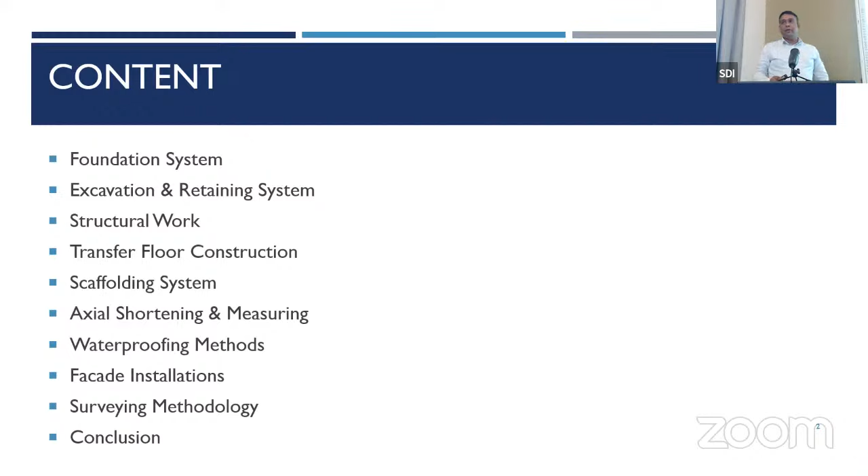This presentation is based on a case study - the Astoria residential project that I was involved in. This is a multi-development project including commercial, residential, and office components.

The project is located at DR Vijayawardhana, R.A. De Mel Mawatha, Colombo 3 in Sri Lanka. That area is normally known as Kollupitiya.

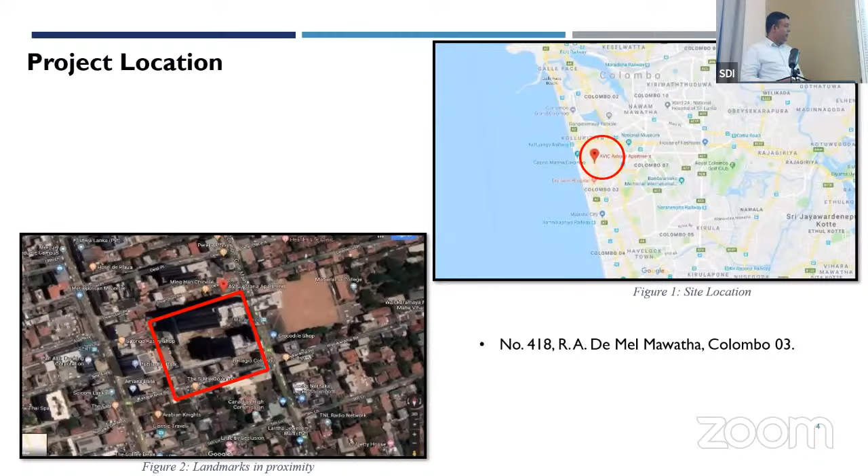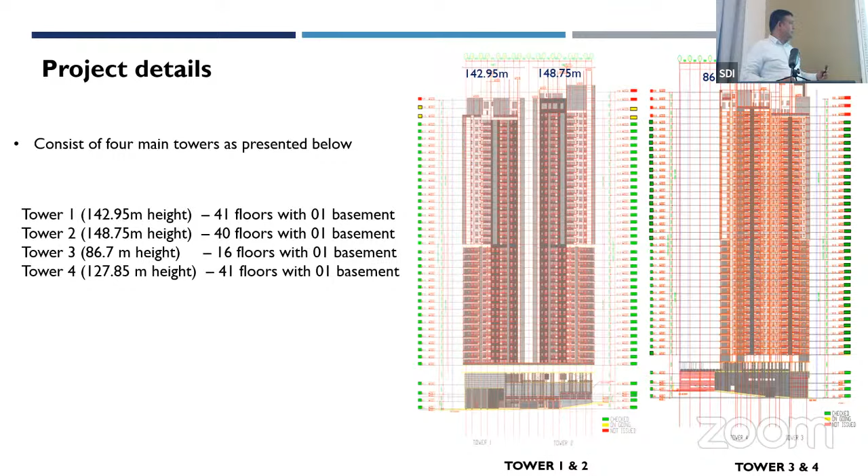The project description: there are 4 towers initially planned, all around 40 stories, but finally there was a slight change in one tower, and the scope also changed. Tower 1 and Tower 2 are residential buildings. Tower 3 is an office building, and Tower 4 is again a residential building. Tower 1 and 2 are almost 150 meters - the highest is 148, and Tower 1 is 142 meters. Tower 4 was earlier designed at 127 meters and that didn't change, but Tower 3 was designed at 127 meters and due to the scope change, it changed to around 87 meters. This is the project layout.

For Tower 1 and Tower 2, the client had already acquired land where the foundation was already done - there was an earlier design for another high-rise building, so all the pile foundation and basement construction were already constructed. Therefore, the challenge was to design the new two towers, converting the existing foundation for the new design, and enhancement and strengthening work was done for the existing foundation and vertical elements. Tower 3 and 4 design was done as a new design, but all 4 towers were amalgamated into one design in the later stage.

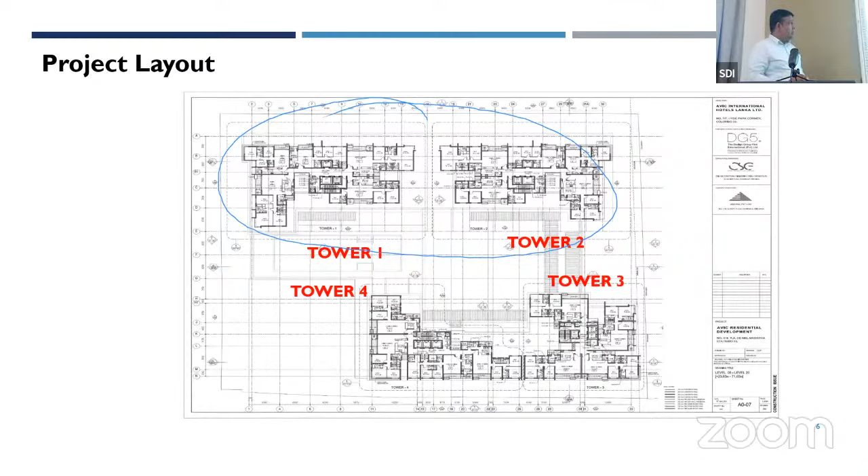So basically for the foundation system, when we consider pile foundation, normally in Sri Lanka most high-rise buildings use pile foundation. So I'm going to talk about piling, but some projects like Cinnamon Life and Colombo Lotus Tower, I've been involved with those projects where we excavated up to the bedrock.

Then we did some raft foundation on top of the bedrock. But here we have constructed pile foundation for tower 3 and 4, and for tower 1 and 2, the piling was done for the previous design, so we used the same pile layout for the foundation for towers 1 and 2. In this project...

we have 4 types of piles by diameter: 800, 900, 1200, and 1800. So total piles are 163. Also for detailing, on the left hand side you can see all the reinforcement detailing done according to the earthquake detailing code established in Sri Lanka. And also for piling rock socketing, we normally use 3 diameters of the pile.

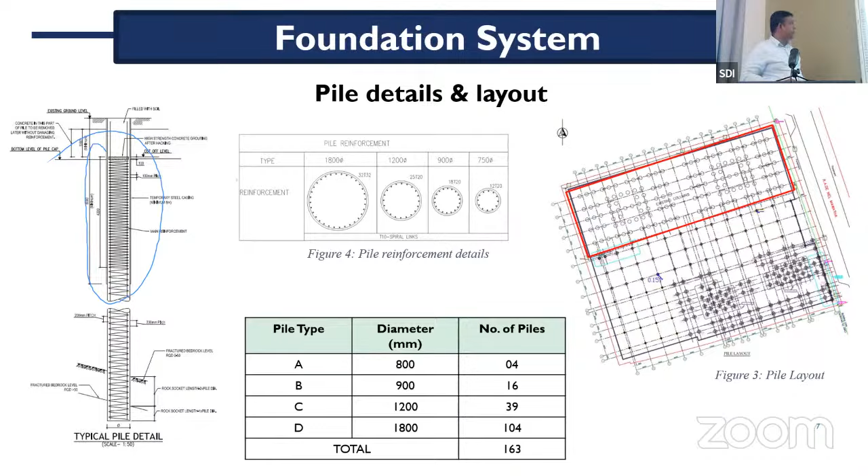So these are the basic construction methodology for pile construction. First you have to do the setting out for the required location. Then we use cast-in-situ piles, and we use very good machines like BG machines to do the setting out.

Then you have to do the casing installation. After that, you have to do the soil boring and rock boring. Once the pile reaches the required level, you have to clean the pile. Before cleaning, you have to insert the reinforcement cage, and then using tremie pipes and bentonite, you have to clean the piles. Once the pile is properly cleaned, you can start the concreting.

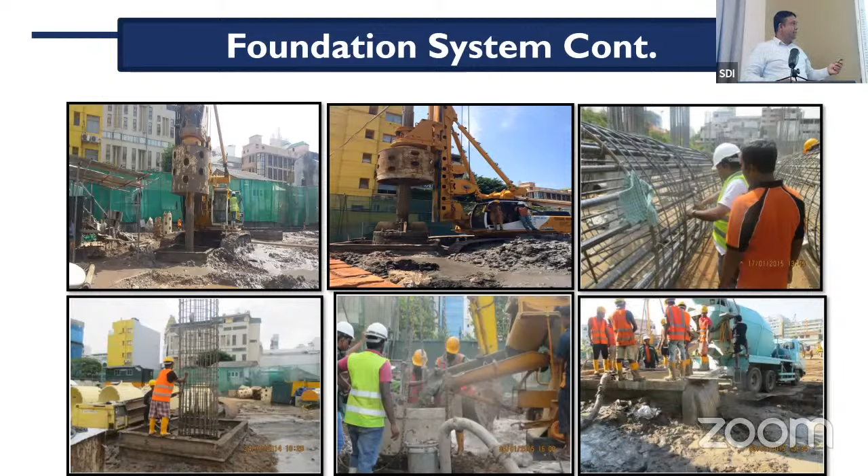Concreting is also done using tremie pipes and funnels. So these are the basic pictures for the piling construction. It's a detailed area, but I'm basically touching on what we have done in the Avic Astoria project.

It's very important when doing pile foundation to determine the rock level. This is basically done with borehole investigation. So normally we do the borehole investigation and identify where the rock level is, and in the normal rock profile you will first find the weathered rock, then the hard rock. So normally the pile socketing will start from the hard rock.

This is important because you can see here there are some formations in the rock, some lower points and higher points. So you can't stop the piling at different levels, because one pile cap having, say, 6 piles for the pile cap, all the piles have to be terminated at one level. Otherwise there will be a different depth depending on the dip angle, so the rock will not be stable.

Therefore you have to go for proper socketing by understanding the rock profile of the piling. This is a mandatory requirement when doing especially high-rise buildings.

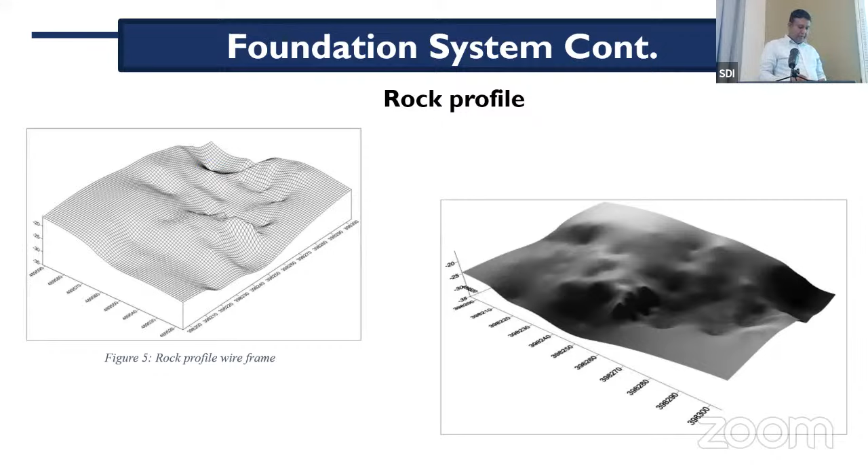Then the other important thing is how you select the piles for testing. This is one of the systems we developed to identify the piling test piles - we call it the fuzzy logic system. Normally if you have 160 piles, the standard requirement is 4% testing for pile dynamic analysis or load testing. Normally we do the integrity test for all the piles, but for load testing we do it for a limited number because of cost factor. Therefore you should have a proper method to identify the most doubtful piles.

So this is the method we use especially for building piling projects, we call it fuzzy logic - we have a scoring system during the construction stage. First of all, we give scores depending on the machine. The first column is the machine: if the contractor uses a good machine, we give a low score. If they use some old machine that takes a long time to do the boring, we give a higher mark.

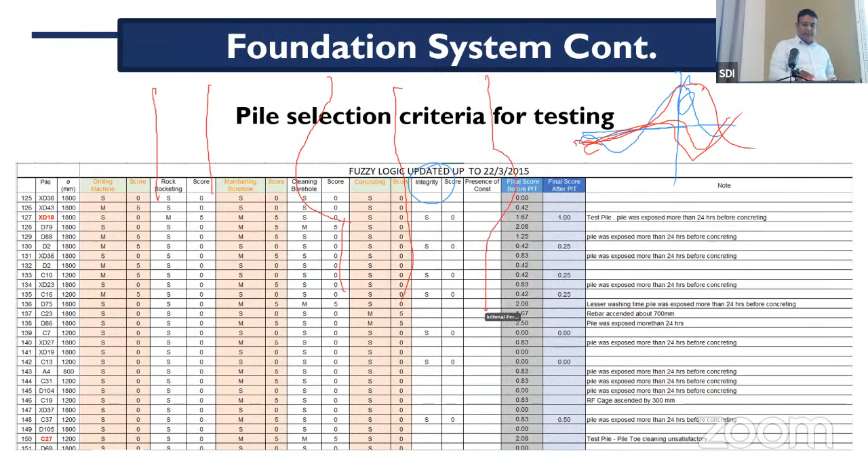Depending on the pile, there can also be bulging on one side, which we call pile necking when concreting affects the neck. That is another defect we can identify in the PIT test. If it's bulging, it's not a major issue, but if it's necking, we increase the marks. Based on that, we identify the total marks and give final scores.

Final scores are given, and for the highest marks, we select that pile as the test pile. This is the method we normally use when we have a huge number of piles.

So these are the pile tests. We have to do the PIT, and normally we do the maintained load test for the test pile. Here in Victoria, we haven't done the MLT before designing the pile, but normally it's recommended to do the maintained load test, which gives a good understanding of the pile's capacity. We also normally do PDA, pile dynamic analysis, on about 4% of the piles, dropping the load and analyzing it with the pile analyzer.

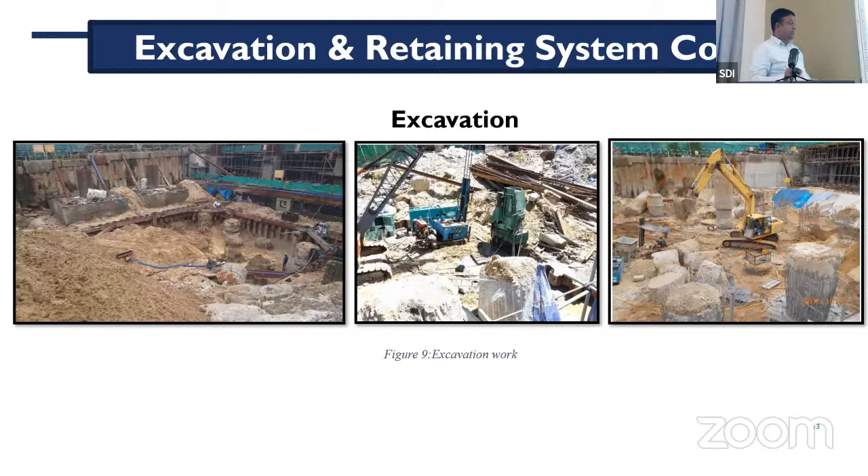During excavation, it's very important to maintain all the parameters, such as the deflection of the retaining wall. You have to monitor the deflection of the retaining system, as you can see here with the pile hacking.

Sometimes for the test pile, before excavation you have to cast it up to the ground level, then you have to hack the pile down to the required level. These are some of the normal practical problems we face with the hacking.

Another important aspect in deep excavation is grouting. Why do we need grouting? That's the most important problem, because most clients are reluctant to do it. They say if you're doing a solid retaining wall, why do you need it?

But when you're doing secant pile or sheet pile, you can't see what's happening underground, so there can be construction defects. To avoid that and get a remedial action, we do grouting along the excavation perimeter. That's why we recommend and use pressure grouting along the excavation perimeter - it fills the voids, enhances impermeability so water won't come into the excavation pit, and strengthens the structural retaining wall.

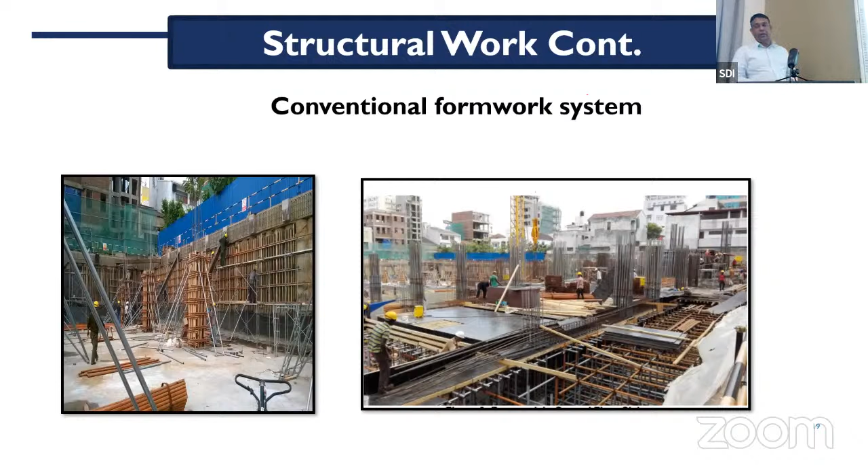There are two formwork methods: conventional formwork or aluminium/system formwork. Here we use conventional formwork because in the basement, the column layout and beam layout change floor to floor. Normally at typical floor level the layout doesn't change, but other areas always change, so it's recommended to use conventional formwork since it's more economical. That's the normal method we use for formwork in the basement.

For the typical floors, normally in high-rise buildings we use aluminium or system formwork. In the Avic Astoria, which has typical apartments, we use aluminium formwork. For the Colombo Lotus Tower stem, it's the same shape and formwork, but the radius and shape change every 5 meters.

For that we use system formwork with a hydraulic system - the shape is changed using the hydraulic system. Here it's a normal straightforward aluminium formwork. These are the advantages: normally we can maintain a 4 to 5 day cycle with this aluminium system, and you can use the same formwork 250 times.

So it's a very low wastage and environment-friendly system. Currently most contractors modify the aluminium formwork depending on small changes like that. It can also bear high loads, such as 60 kilonewtons per square meter. When designing the formwork, it's better to get a higher load capacity for this one.

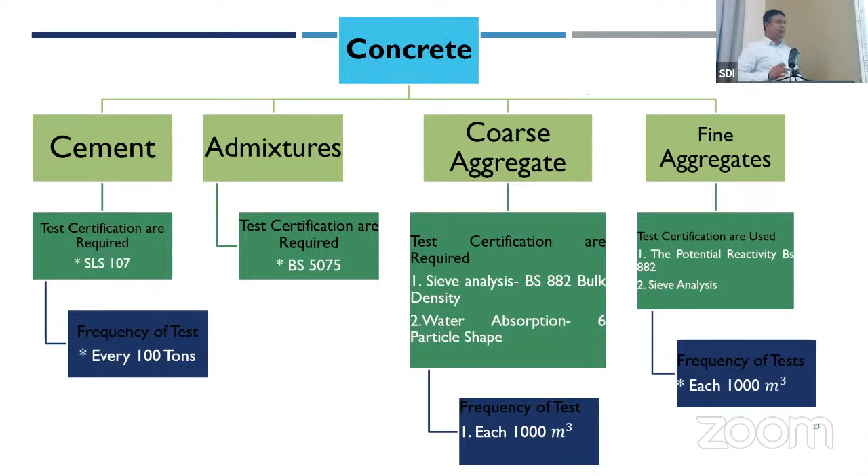Also fine aggregates - nowadays we have a scarcity of river sand, so we use alternatives such as manufactured sands and sea sand, washed sea sand. Normally we recommend using washed sea sand.

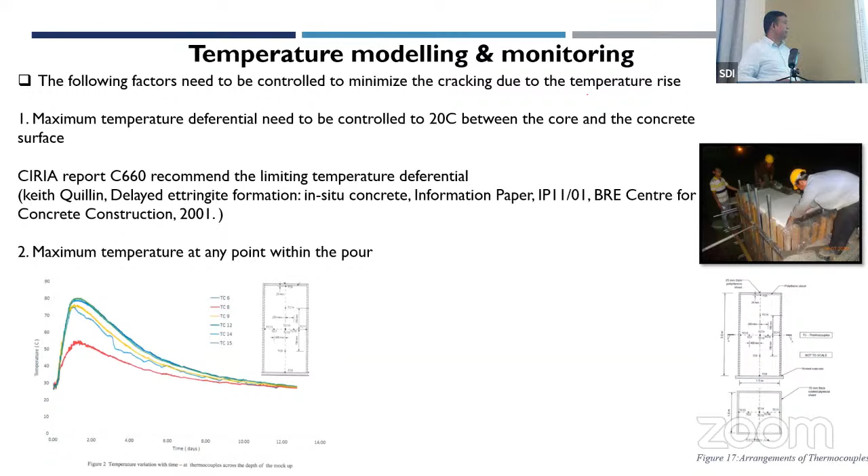These are the guidelines given in the specification, but we also use the same guidelines with modifications. Normally in our country, we have a very high temperature, so our concrete core temperature can go up to 75 to 80. But the temperature difference is limited within 20.

So normally you have to do a concrete mock-up. Here you can see the picture - we have done the mock-up, 3 sides insulated and one side with normal formwork, and we inserted thermocouples to measure the temperature. You can see when hydration starts, the temperature increases with time.

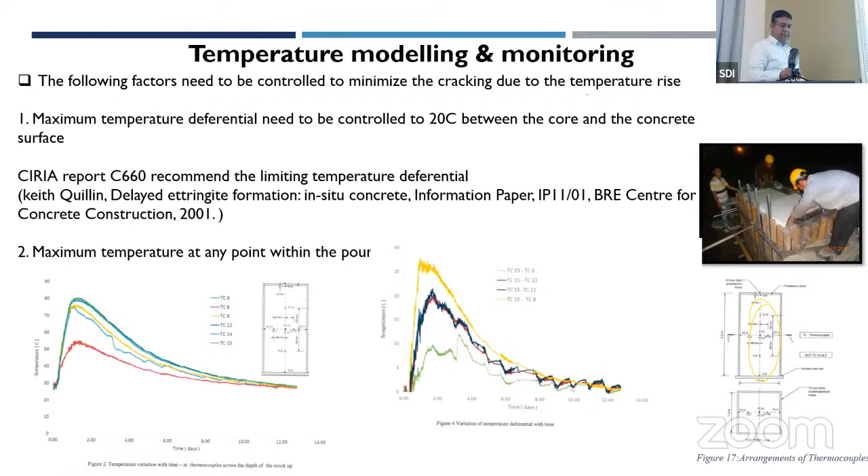These are the temperature modeling and actual scenario, so when the temperature is too high, you can't use a normal curing method. You have to use sand, or sometimes sand can be used in ground construction.

But when you do high thick concrete at the top of the building, like a transfer floor, you can't use sand. So then you have to use an alternative method. I will come back to this when considering transfer floors.

So these are the temperature readings. You can see the actual behavior in the pile caps, how it changed.

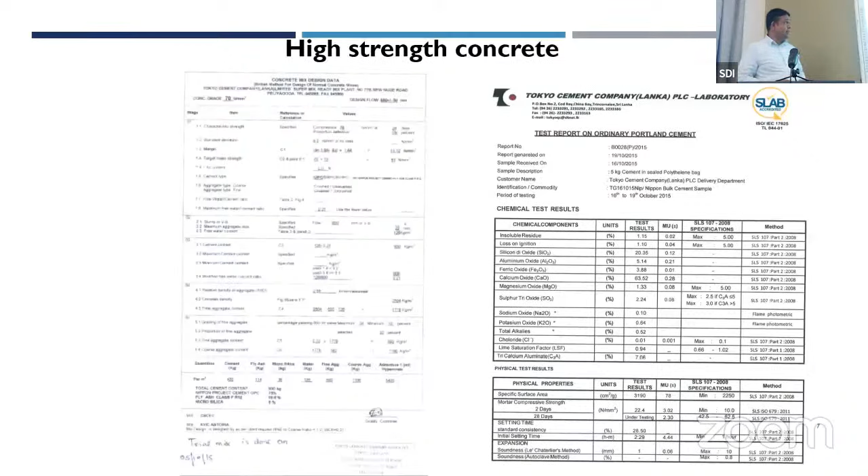In the Avic Astoria, we use high strength concrete, grade 70. Here also we have done several mix designs and finalized. These are the final mix designs.

There are 2 mix designs. One is normal concrete - you can see the slump flow of the self-compacted concrete is around 660, and also the water cement ratio difference depends on the workability, 0.21, very low water cement ratio in the self-compacted concrete.

We use fly ash for the OPC cement, and sometimes we have to use silica fume also for high grade concrete, but here we didn't use silica fume.

Concrete testing, as I said, is very important. Normally we are doing the slump test, the flow test, and the temperature. Temperature is also important when you are doing the concreting.

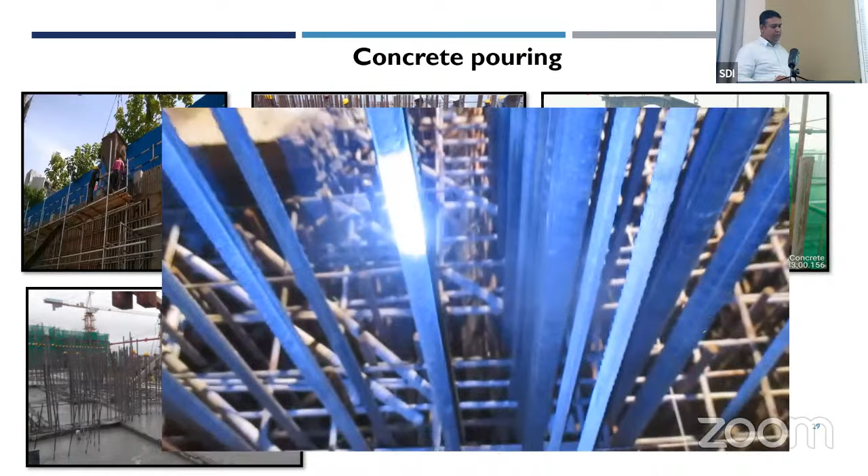So these are some of the concrete we use. You can see the concrete flowing smoothly, high strength concrete and self-compacted concrete.

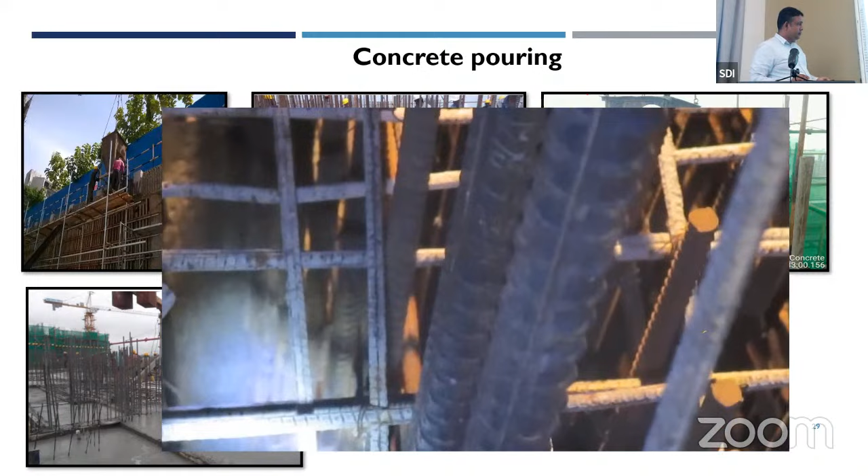So these are the transfer floor concrete. You can see this is a transfer floor. So the whole layout will change from that level, and then it acts as another foundation.

So normally in the transfer floors, we have to go for conventional formwork because it's not economical to go for aluminium. But if you have the resources, you can use it and it's much easier.

But when you are involved with higher, thick sections, it's recommended to go with plywood formwork. Otherwise, temperature difference will cause a problem.

Normally, transfer floors consist of deep beams and thick slabs. Beams like 2 meters, 3 meters. Slabs also around 600, 800 mm. So those are the concepts of transfer floors.

You also need a properly designed formwork for the transfer floors, because it involves huge load. The construction load is too high, so you need a proper formwork system.

Normally, we recommend going with a bracing system, including bracing, because the height of the transfer floor - the height between the transfer floor and the lower floor - is around 6 meters or close to 6 meters.

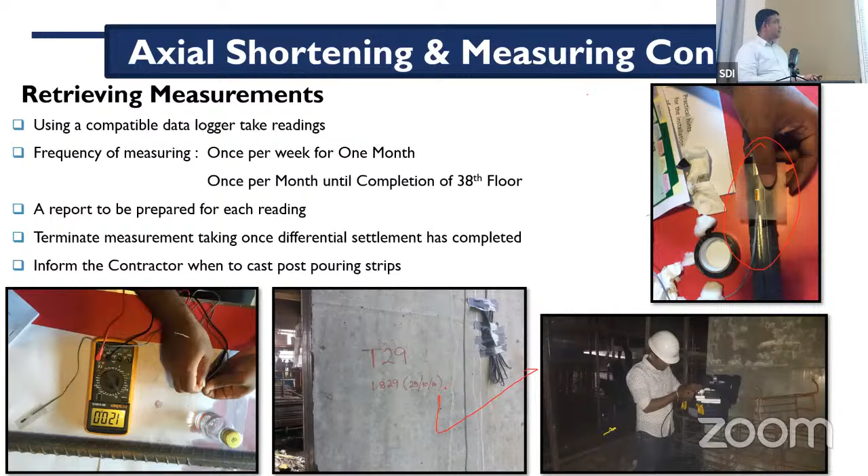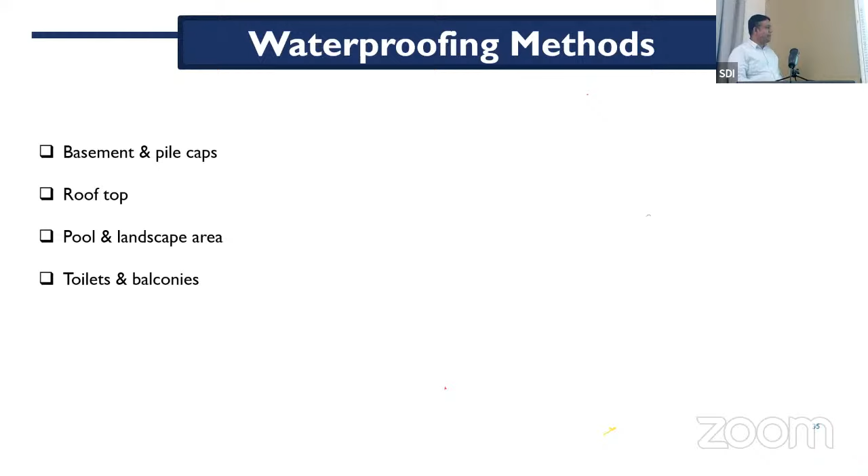So I'm going to slightly talk about the waterproofing. There are four major components: basement, rooftop, pool and landscape area, and the toilets. You have to focus more on the basement because, as I said, we are going deep basement, and you always have a lot of issues with waterproofing there.

Normally here we use the bentonite type, otherwise you can go for the bitumen based one. The bentonite one has more advantages. The bentonite one can be kept exposed for a long time. Normally basement construction takes a long time, so here you can expose it and keep it long term. The second thing is you don't need the screed concrete to cover it.

With bentonite, special treatment needs to be done at the edges of the pile cap, otherwise there will be issues. Also there will be a PVC water bar in the construction joint, which will avoid differential settlement as well.

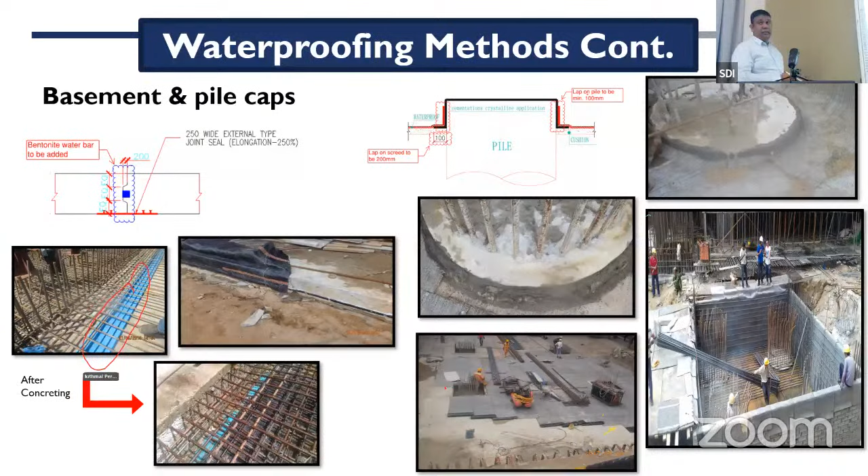It's recommended to do pond testing before the waterproofing and after the waterproofing is ready. If there is any structural defect, you have to rectify it. Also in waterproofing, it's important to control the moisture content as well.

So normally most of the contractors and builders are doing it without reinforcement, which will lead to cracks as well.

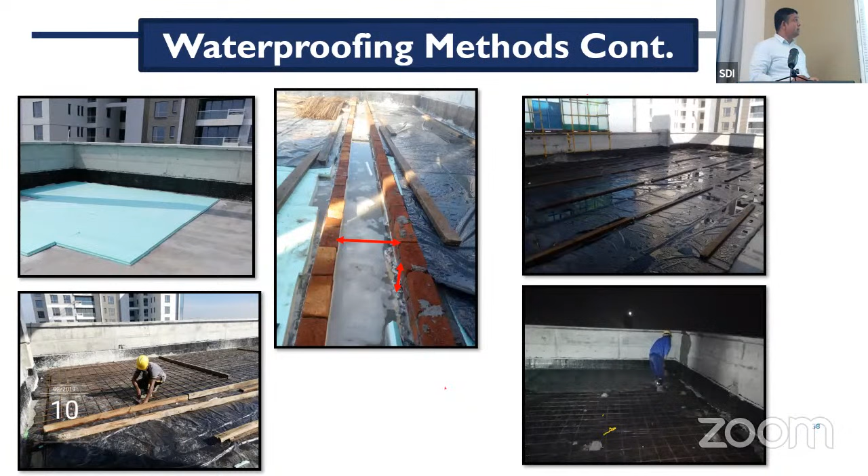Also a proper drainage system has to be introduced, then it will improve the water flow into the gullies.

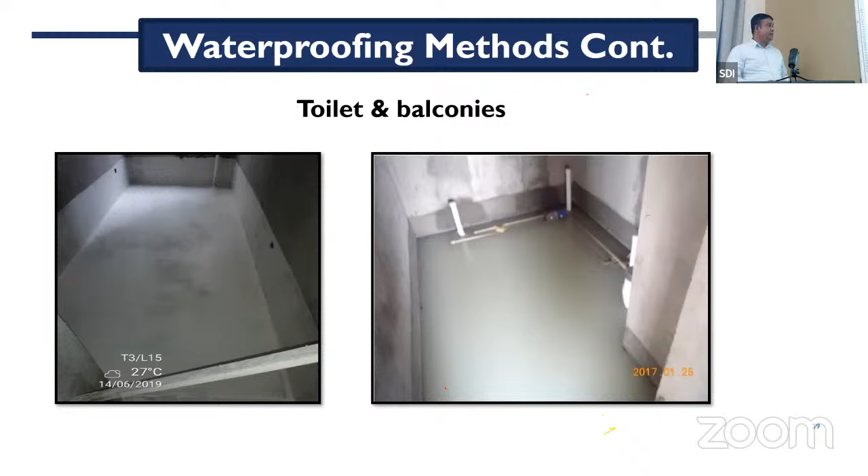For toilets and balconies, we normally use cementitious waterproofing. As you know, you first have to do 2 layers, and also 48 hour pond testing is mandatory to check for any leakages.

Facade installation also depends on the high-rise building. Normally in high-rise buildings you have to do the wind tunnel test to see how it handles horizontal loading. Based on that loading, you have to design the facade.

In the Avic Astoria project, we also did some testing in China. We applied the loads to see if these designed aluminium sections are appropriate for the loading.

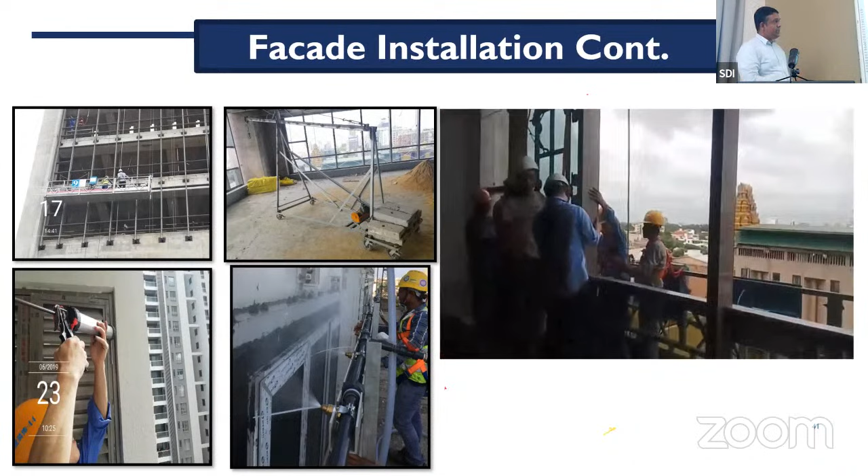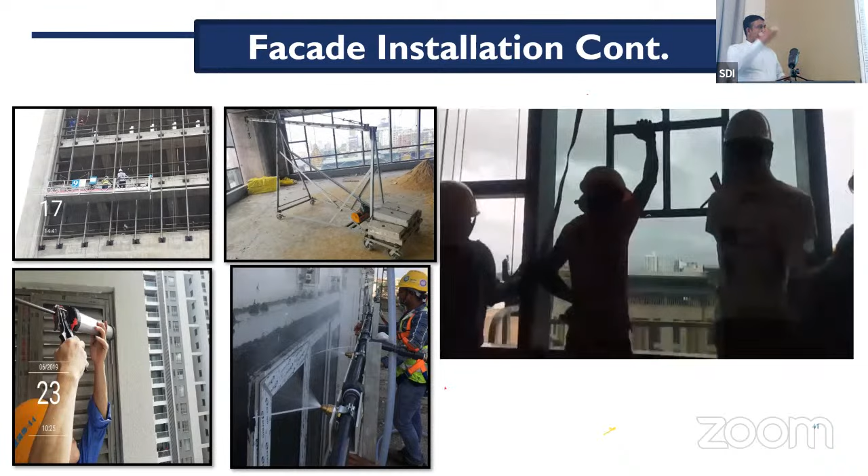Here we have a stick type facade. You can see how they install this one. Stick type means you first install the mullions and then fix the glasses. You can see first they install the mullion and then do the glass.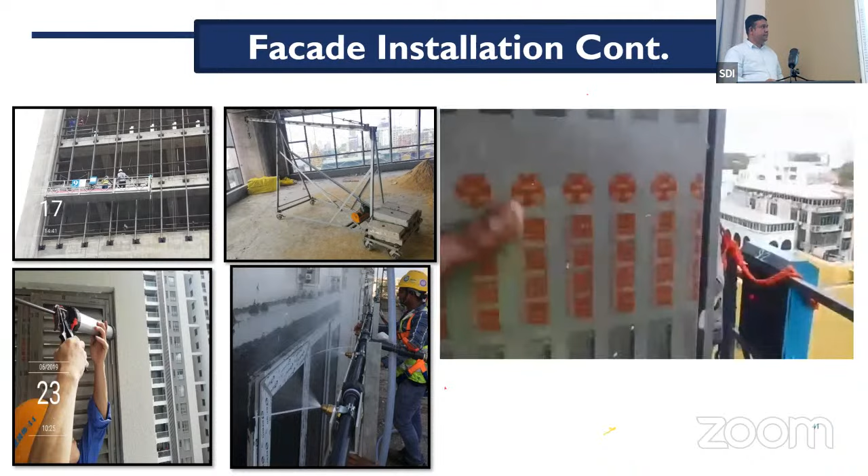The other method is the Unitized method, meaning you fabricate the panel and install it. Lotus Tower used the Unitized method, where the whole panel is fabricated outside and installed. With the stick method, mullions are installed and then glasses are put in. These are the 2 methods we can see.

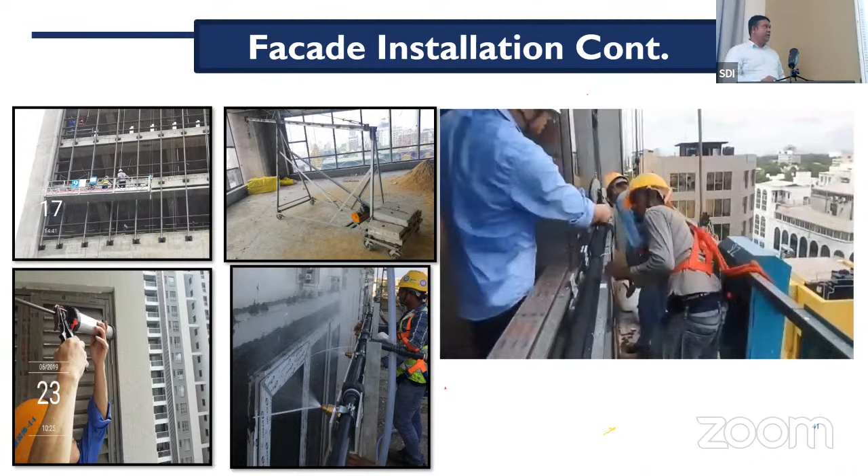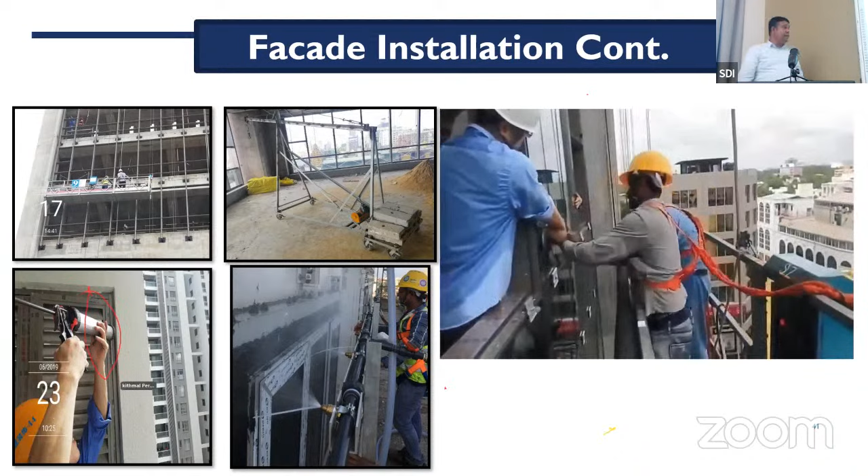It's also highly recommended to use structural sealant, specifically structural weather sealant, for the outside, and you have to do pressure testing. Normally the recommended pressure test is 2.5 bar at 300 millimeter distance, and you have to apply the water pressure.

So this is the system we use: we put the pipe and pressurize the water to see whether there's any penetration through the window panels.

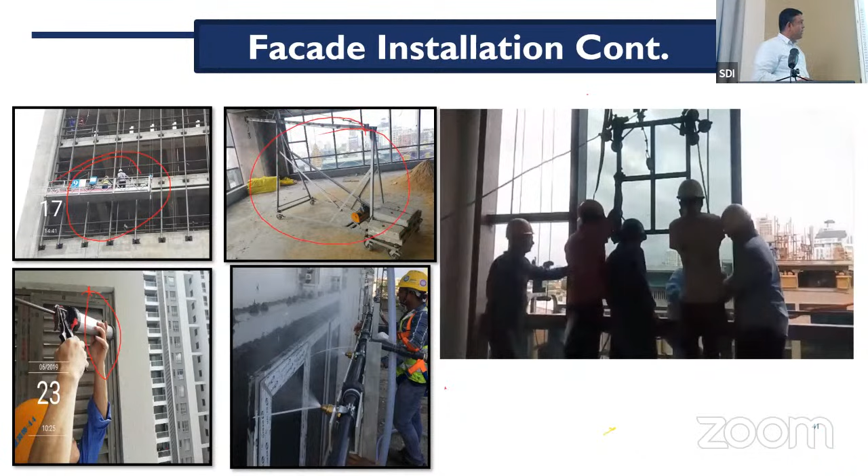Also you need different equipment, like this man hoist here, and also the counterweight system. Those are more important, so you have to plan according to them.

In high-rise buildings, you need different methods to do the survey; the normal methodology can't be used. Normally in the survey we are using the GPS method, and also traverse survey has to be maintained, because your control point cannot be changed. You always work with the control point.

Sometimes most of the control points are not within the site but outside, because when you are working on a high-rise building, you can't see a close point. You have to use an outside point.

So in Avic Astoria, we had a few points outside the premises, and also Lotus Tower, we had some points 1 kilometer away from the tower. So then it's very appropriate details we can get.

After 100 meters above structures, you cannot do a normal survey, because the structure is subject to thermal deformations. That means in the daytime, if you get the point here, the building is moving like that, so you can't get the exact point. So normally in high-rise buildings, survey is done in the early morning to reduce the thermal deformation.

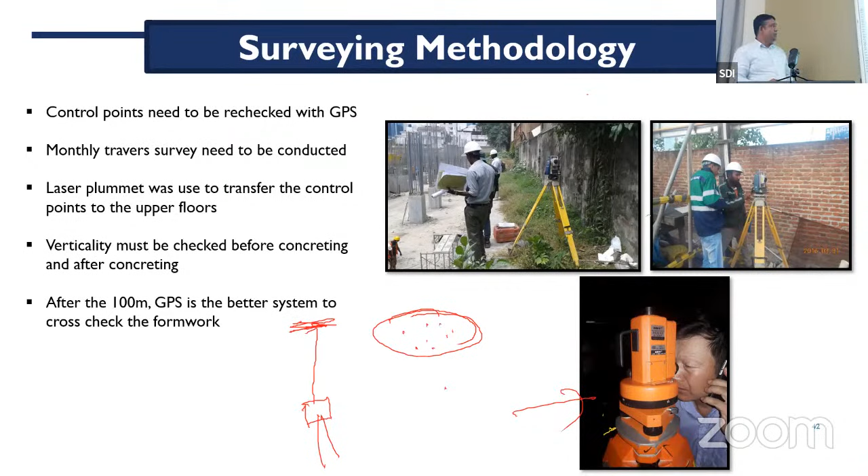So this is the conclusion of today's presentation on high-rise building construction. Basement construction will take a long time, so it takes time and cost. So it's advisable to go for mezzanine floor parking likewise, but it depends on the land value. Sometimes you have to go for the basement, but it takes a long time for the project, and also a lot of disturbance and interruptions are encountered, and it's very difficult to handle the groundwater.

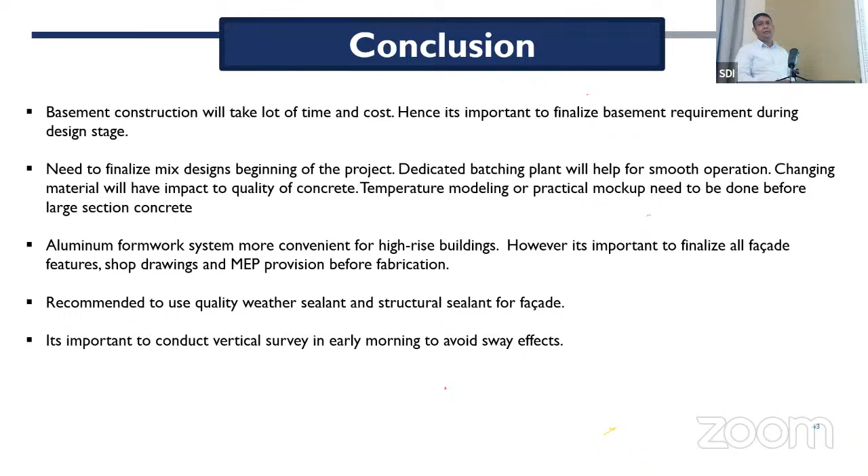Also, as I said, quality weather sealant and structural sealant should be used for the facade for durability. And verticality is more important in high-rise buildings, because in a few projects we had problems with the lift installation.

Normally we do the tolerance within 50 millimeters. So when constructing a building more than 150 meters, if the lift core changes by 100 or 150 millimeters, it's very difficult to install the designed lift. This happened, I think, in the Altair Dialog building as well, same thing happened there. So it's important to measure the verticality of the building.

So thank you very much for today's presentation. I can answer any questions if you have.

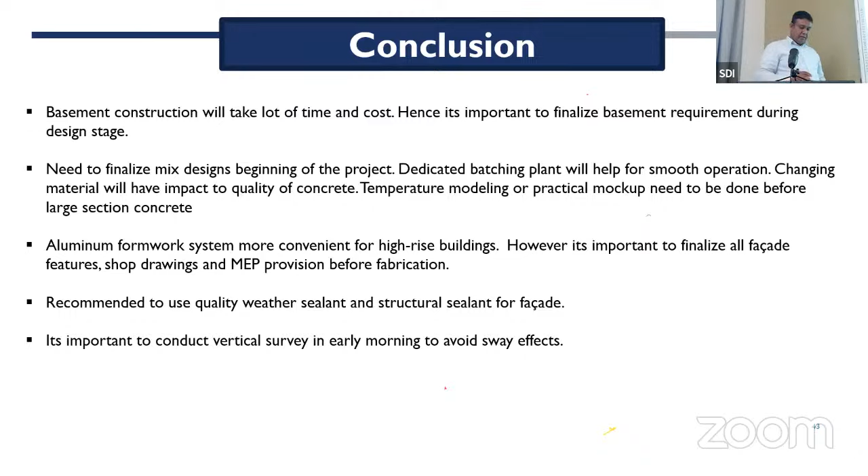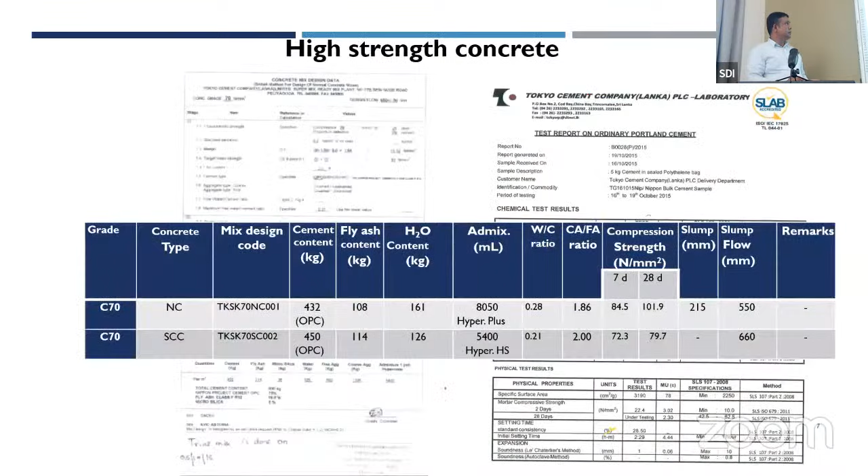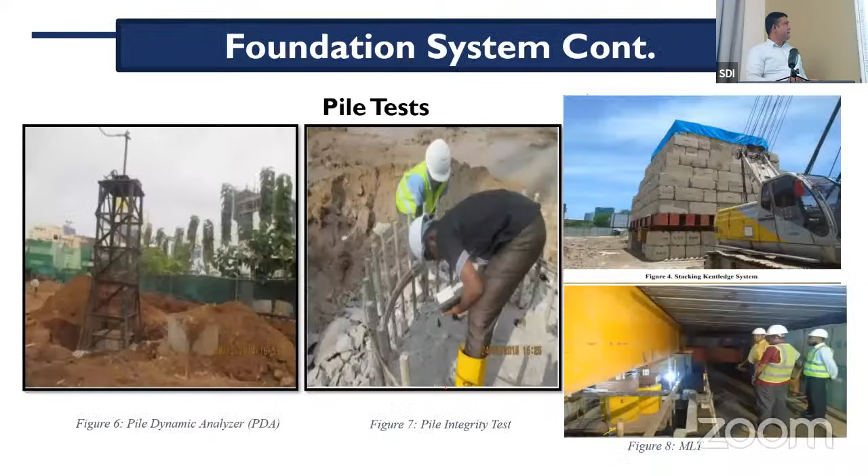The next question is, a score is given for pile integrity, but fuzzy logic is used to select a test pile. Is pile selection not necessary to do the pile integrity test? I didn't get it. So for the pile integrity, you have to do the pile integrity test for that, yeah, we have to do that one.

So that is done separate to this? Yeah, separated. Normally, first you do the fuzzy score at the construction stage, and after that the integrity test. Because as I said, for integrity, some piles have cutoff levels well below the ground level, so then there are practical issues. But anyway, if the integrity of the pile is not good, that means we have to do the testing.

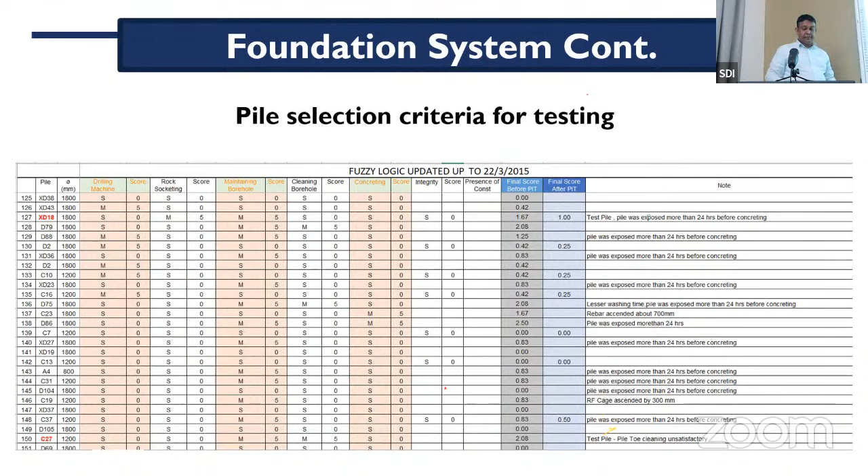In the case of monitoring the deflection of the retaining wall system, we need the tilt meter, biaxial inclinometer, piezometer, strain gauge, etc. Is there any company we can contact to get those services? There are so many well-known companies in Sri Lanka doing pile testing — yes, they are doing the testing.

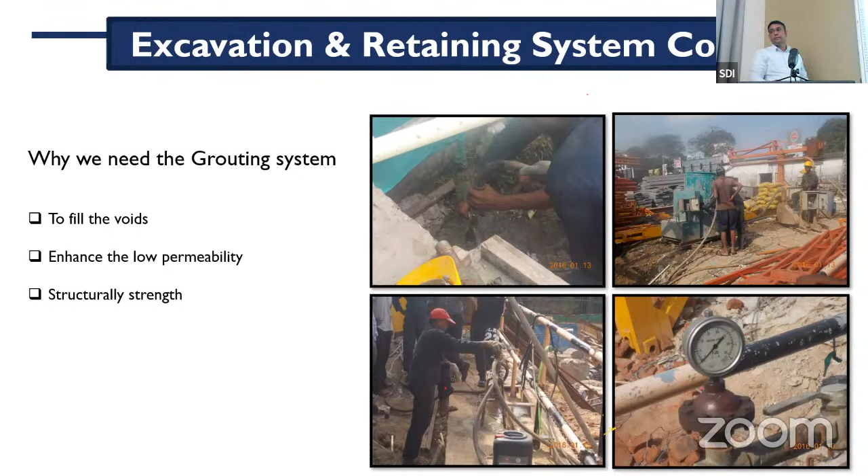Next, in basement slab and pile cap construction, how do you tackle the peak hydration temperature issue? As I said, you have to do proper mix design, and temperature controlling has to be done using cold water. If it's still exceeding the required level, you have to use cool water pipes — we used this in Havelock City, which is the extreme level. Otherwise, you design the mix and use cool water, and sometimes you have to cool the coarse aggregate, since that's the biggest weight contributor. You can also put ice on top of the aggregate — we did the same in Lotus Tower, covering the coarse aggregate with ice. That's one method.

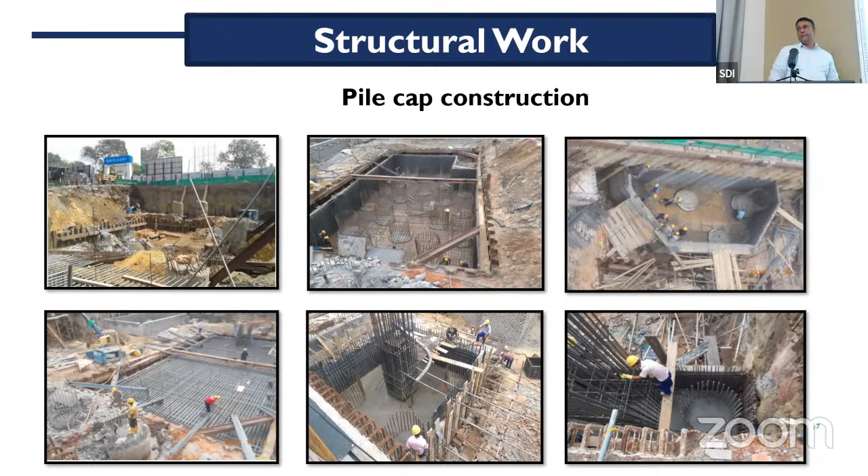The next question is about water cement ratios. Actually, Mr. Kithmal shared the slide with the ratios just after this question, so I think that should answer it.

Can you elaborate the difference between high strength concrete and high performance concrete? High performance concrete depends on workability — there are different parameters you can classify it by. For example, high performance concrete can be self-compacted concrete, high durable concrete, or high strength concrete. High strength means more than grade 50, but for high performance concrete, the grade should be more than grade 80 — understood? Grade 80 means very high strength. Normally we say high strength is more than grade 50, but not all high strength concrete is high performance concrete. That is the theory.

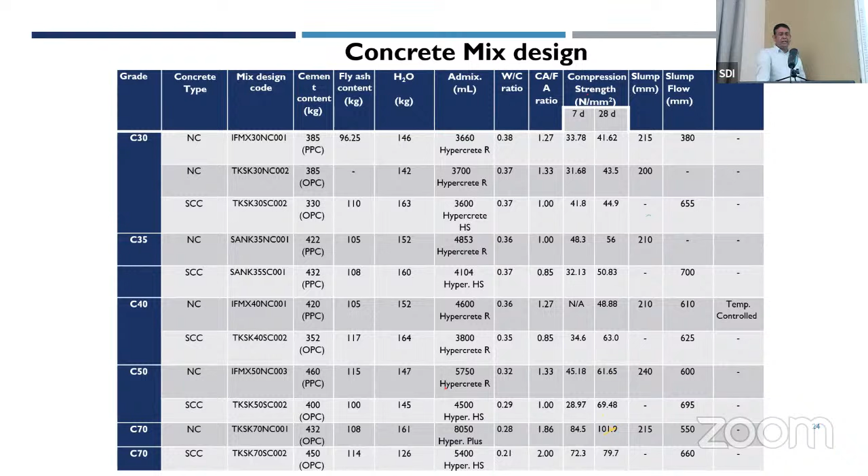In case of casting massive volumes of concrete, what is the procedure for preparation of test cubes for the cube test, for either 14 days or 28 days? Normally we are doing one set for every 50 cubic meters.

Normally we are doing the 7 days and the 28 days testing. No need to do the 14 days, depending on the requirements, but normally we are using normal procedures.

When we cast the transfer floor, the first stage is cast up to the slab bottom level, and the balance can be done the next day. Is there any chance of forming cold joints? No, you have to treat that. Normally we use a bonding agent and proper preparation of the joint. But it's very difficult because you are doing the construction stage-wise for the formwork design, since you can't get the load together for the whole load, and also to expedite the construction.

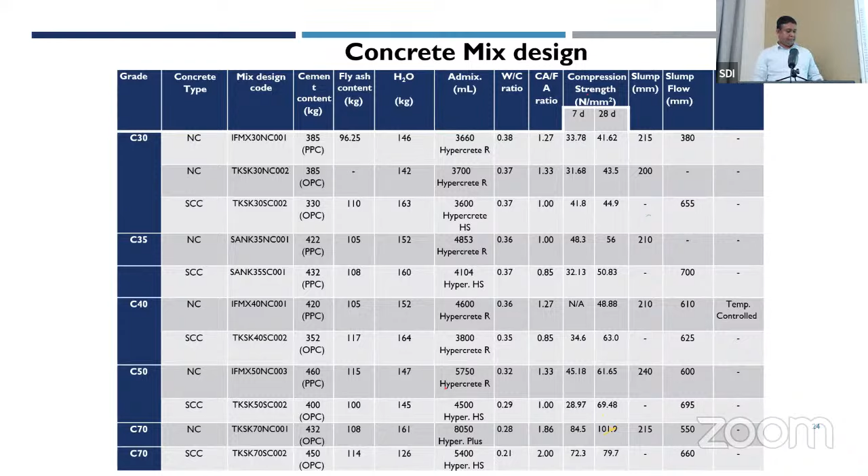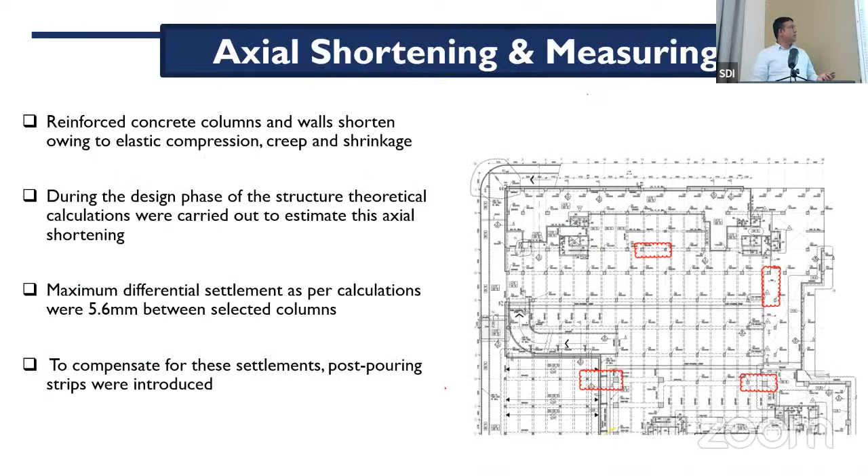What is the strain gauge action? How do we measure the shortening using a strain gauge? Can you share that slide? So here, what we are doing is we calculate the resistance changes, and then based on that we calculate the induced strain. That is the theory we use to calculate the axial shortening.

How did you tackle the issue in order to minimize axial shortening effects on the cladding, facade, partitions and finishes of the building? As I said, we introduce a post-pouring strip. Once the settlement is completed, we cast the post-pouring strip and then go for the facade. That is the normal method. So for axial shortening, if there's a considerable amount, there's no point doing the facade. It's better to keep it until that stable stage.

With regards to waterproofing, won't bentonite get affected by rain? It can, so it can't be exposed, as I said.

In a rooftop, how did you arrange the expansion and contraction joints? Normally we are not providing an expansion joint for the roof slab because it's not advisable. But you have to keep the expansion joint for the screed concrete, otherwise it can crack.

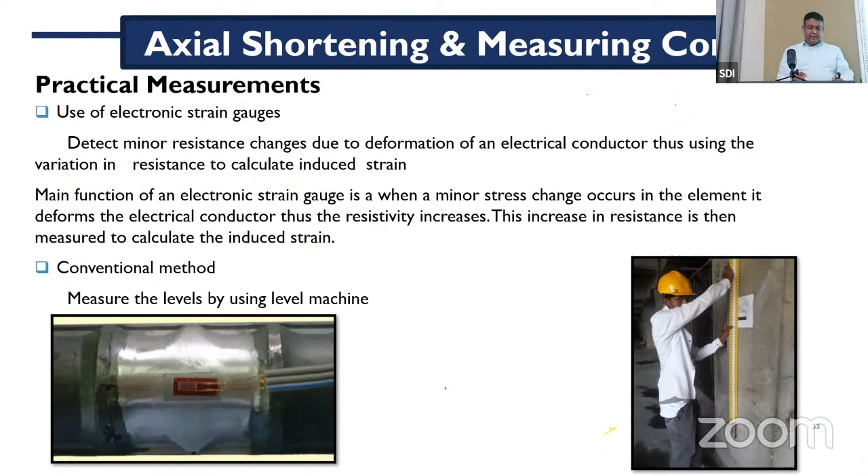Any other questions? There was a slide which you showed for the beams, where they were building using a certain theory. Yeah, so doing that, we can just keep the form. But how do you handle the top? Because that construction is done...

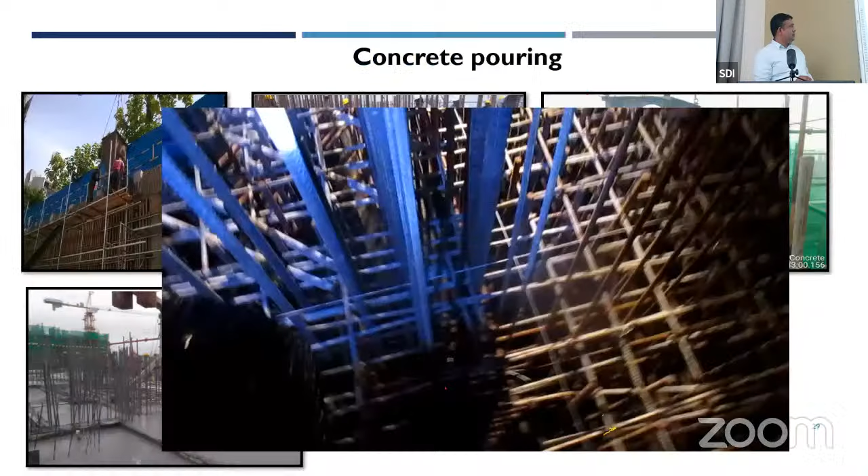This one, no? This one—so from the top, how are you going to cover it? If it rains, you can't stop the watering. This is one of the issues—if it rains, definitely water will go in. But this is a precaution we can take at least.

Questions? That's all. That's it. Okay, thank you very much.